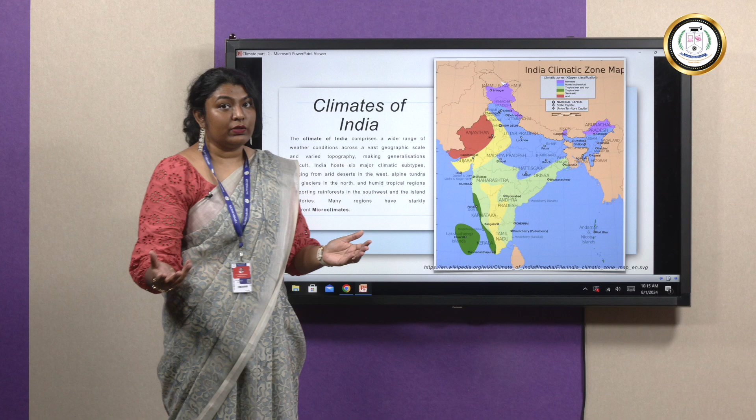Moving from Rajasthan towards the mid, we have the semi-arid, and all the green spaces you can see are the tropical climates. In specific, we have the tropical wet, which has a lot of rainy days alongside the coast, starting from Kerala, moving towards Maharashtra, which also covers the Union Territory of Goa.

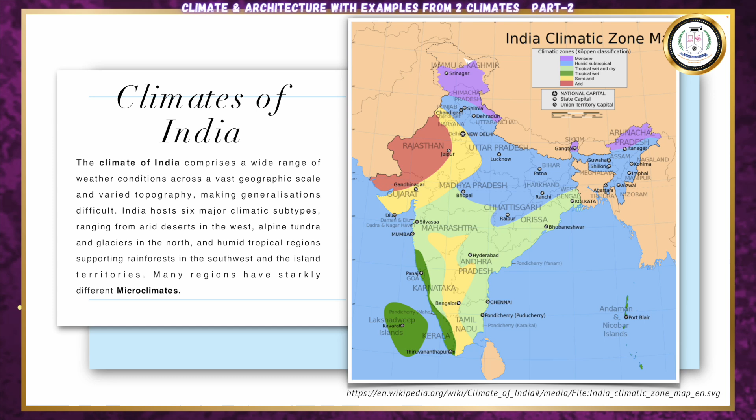The rest you can see is a lot of tropical wet and dry, which have distinct wet seasons and distinct dry seasons. Throughout the middle, you can see a bit of semi-arid, especially around the Deccan Plateau, moving towards the south of Tamil Nadu. So now coming to tropical wet and dry.

If we're going to specifically talk about wet and dry, it is moderately hot. It has high levels of humidity, and it is mostly associated with the coastal area of India. Temperatures don't fluctuate as much in these regions, and there are distinct wet and dry seasons.

That is, there are distinct seasons where there is rain, and then there's a distinct season where there's not much rain or no rain at all. Temperatures are usually moderate to high throughout the year.

Now, what are the components that make up tropical wet and dry climate? First off is the precipitation. We already talked about it: distinct wet, distinct dry, and the weather.

We also see convectional thunderstorms day to day. The locations are in the mid states of Madhya Pradesh, Orissa, West Bengal. As you move down, you have Maharashtra, Karnataka, and the five southern states.

Flora and fauna: because of the wet and dry conditions, there's a very diverse flora and fauna which forms the biodiversity. I think the Nilgiris is a very good example of a biosphere which has tropical climate, and the vegetation is biologically diverse.

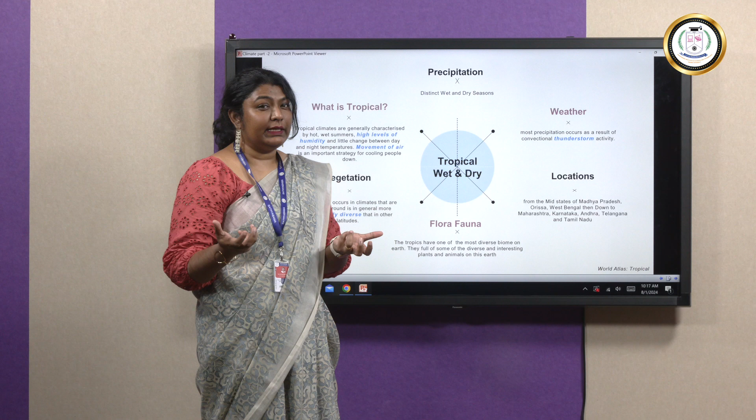When it comes to what exactly is tropical, it is generally characterized by hot, wet summers, high levels of humidity, and little change between daytime and nighttime. That is, there is not much diurnal change in the temperatures.

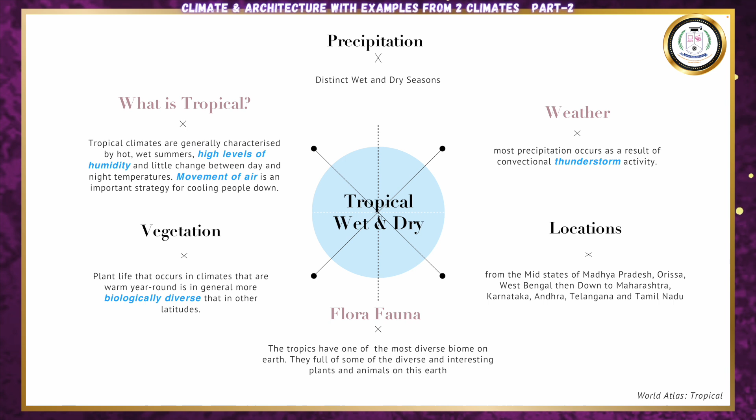Movement of air is a very important strategy to make sure people don't feel sweaty and sticky. So, starting with the design strategies: first, we have the basic passive strategy of orientation.

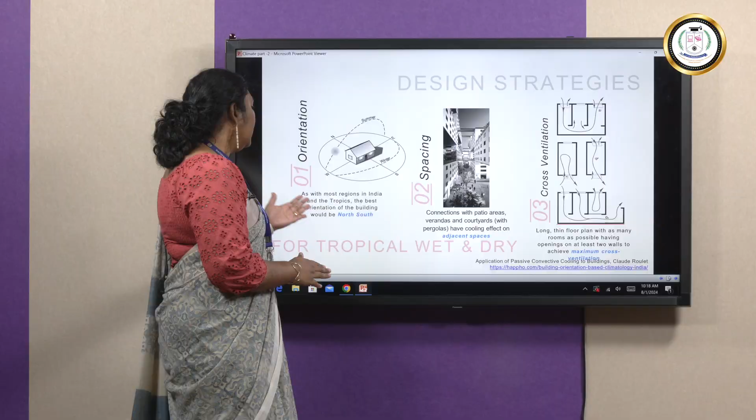In most regions with wet and dry climate, it's best if we have orientation towards the north and south with longer walls and longer surfaces, and east and west with shorter space.

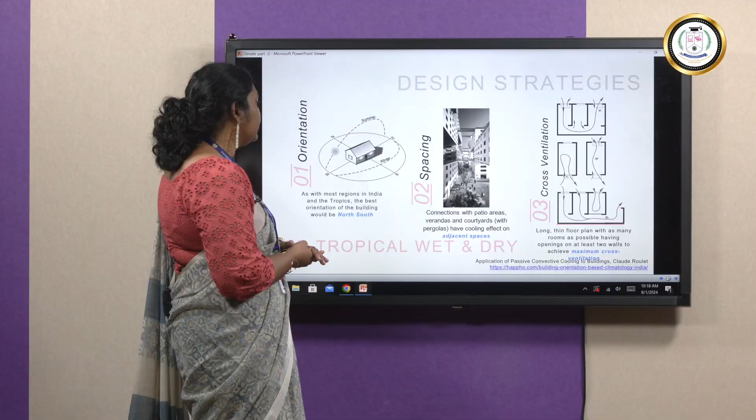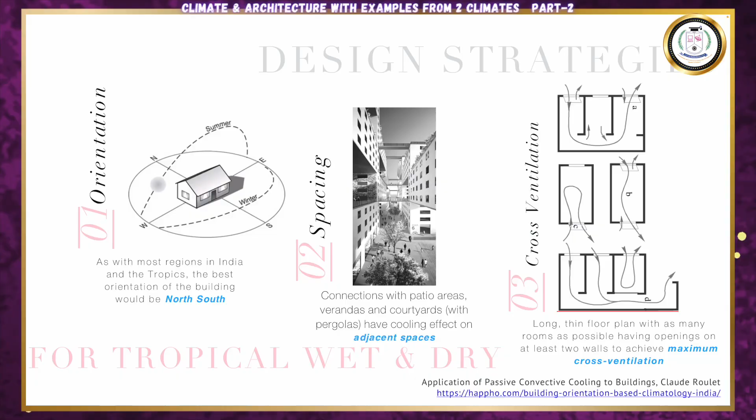The spacings need to have connectivity and openings in between, so we can add atriums and courtyards to increase cross ventilation, which is a very important aspect of this humid condition.

Verandas form a very important role in this particular climate, because we need that open space around the building which acts as a buffer between the outside and the inside.

Shading is not just for the sunshine but also for the rain that comes or shouldn't come within the building.

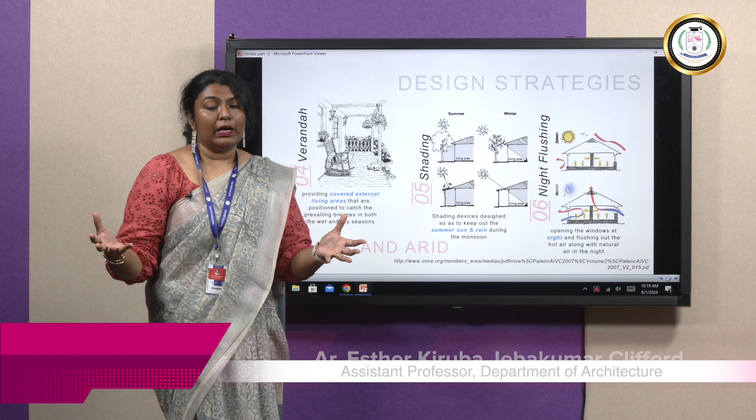There's something called night flushing, which we can do in tropical climate, where we restrict the amount of air that comes into the building in the daytime, and then we open the building up at nighttime, and there's a huge gush of air that comes in, and it gets cool during the nighttime.

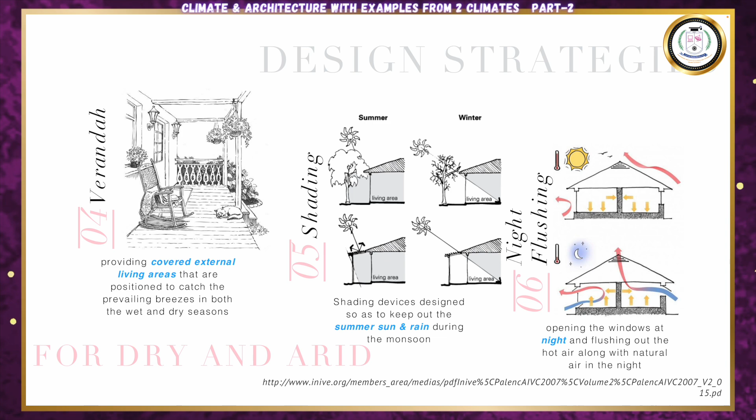This doesn't always work. I think when we are using the building during daytime, it might not work as much, but it will work when you're using it predominantly at nighttime.

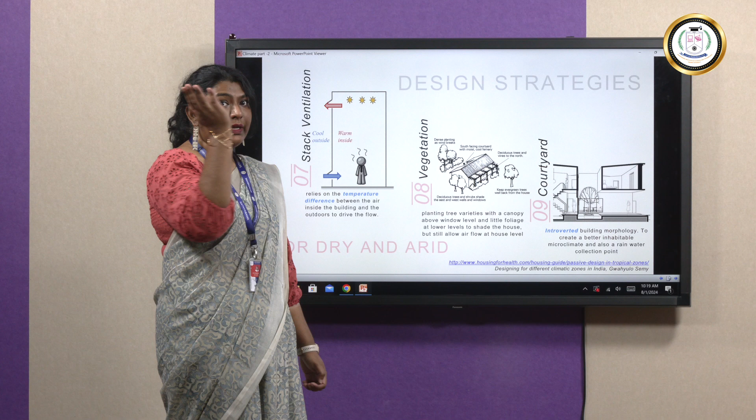Then you have stack ventilation. Stack ventilation again follows the principle of convection, where you start pushing all the hot air outside and upward, so the cooler air stacks at the bottom.

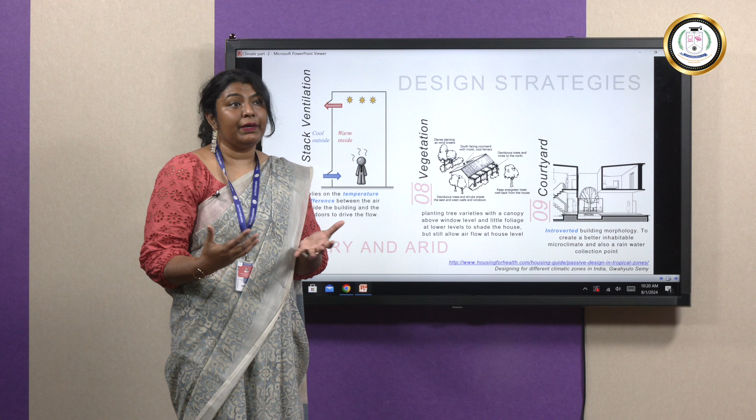You can use vegetation as a form of reducing heat gain and making the space comfortable. Based on what kind of trees you have, you can work with landscaping and use indigenous and native plants, so that there's not much water usage as well.

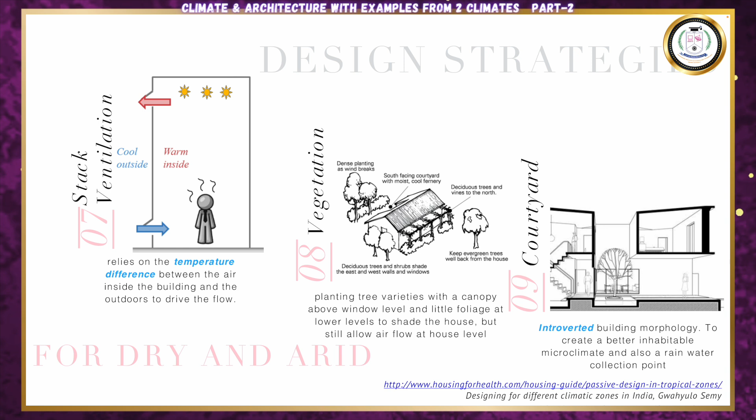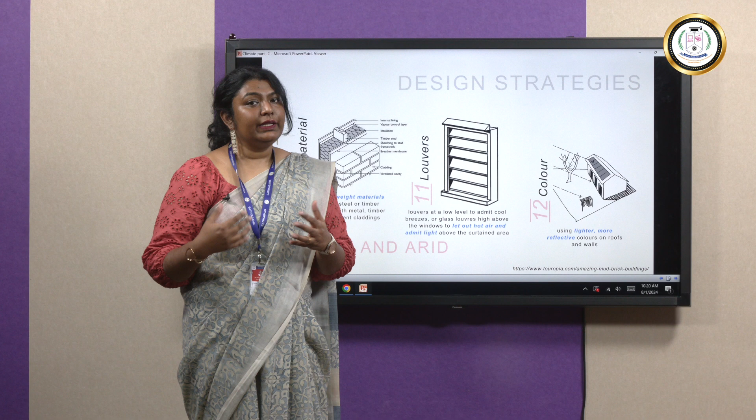Very similar to the previous dry and arid climate, courtyards with an introverted morphology help create comfortable spaces. When it comes to materials, lightweight materials work well with wet and dry conditions. Louvers can help not only let in light, but also air in the form of ventilation. Using lighter colors helps reflect back heat, which is a definite design strategy.

So what are the design inferences overall? The morphology is where we maximize skin opacity, making as many openings as possible, and stacking the building to ensure lots of ventilation so hot air is pushed out. We reduce internal obstructions in terms of density, and arrange buildings so they're not spaced too densely together. For the roof area, we might need portal roofs or sloped roofs where there's more rainfall.

We need deflective or reflective surfaces, larger openings to let in ventilation, shading for both rain and sunlight, and thicker walls with larger thermal mass to reduce the heat coming into the building.

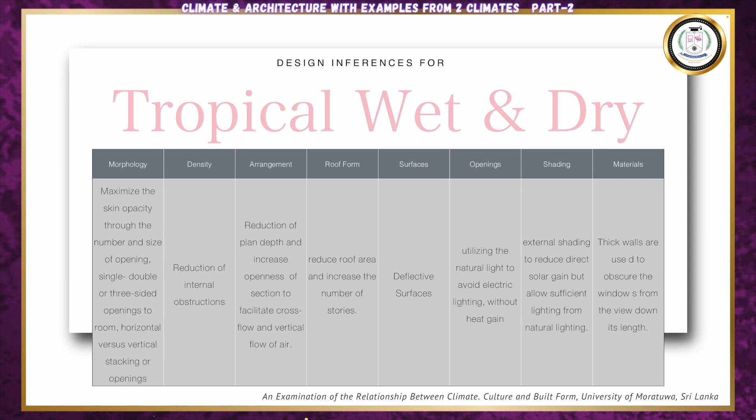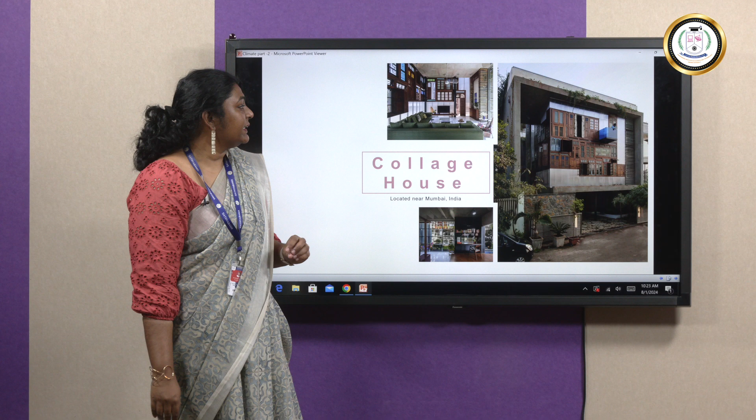The example I've taken for this climate is the Collage House, located near Mumbai. It's been featured as one of the most unique houses in the world, and you can see why given the kind of windows arranged all around the facade. This is in a typical wet and dry tropical climate.

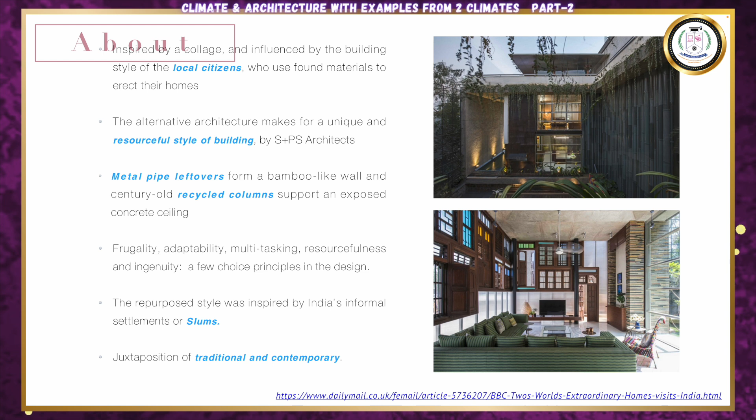It's inspired as a collage because you can see how all the windows are put together in a particular design. It's interesting that this house used a lot of materials that would have otherwise gone to scrap or landfills—they took the materials, refurbished them, and reused them in this building.

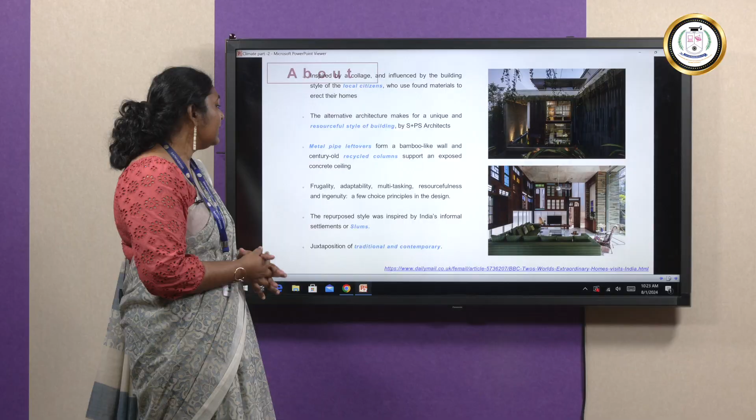This is by S plus PS Architects. They've used a lot of reused materials, like recycled columns or pillars taken from local traditional houses, and metal pipes which act as a water feature and also in the rainwater harvesting system within the building itself.

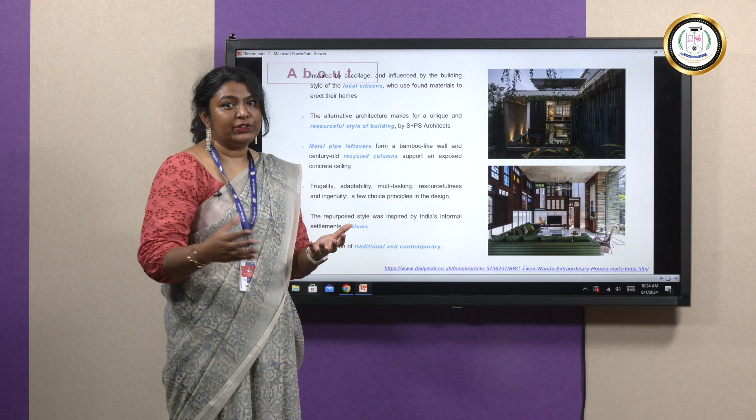The style is inspired by the informal settlements of Bombay, where you see a very vibrant, colorful atmosphere, since they tend to use a lot of discarded materials within their housing. There's a juxtaposition of contemporary and traditional within this building—you can see how they've taken windows from different buildings from different eras and put them together to form the front facade.

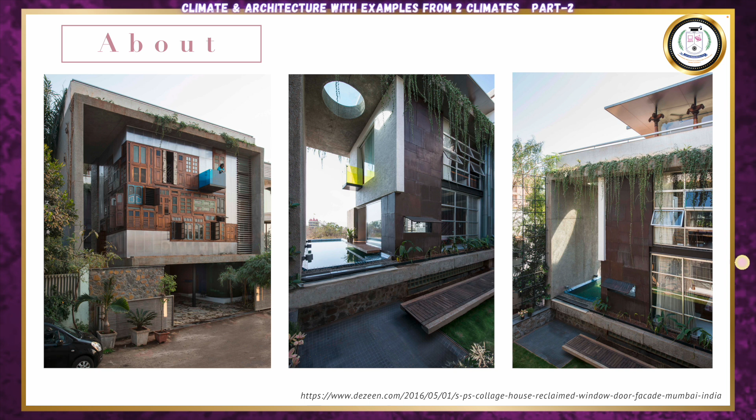The windows aren't locked; they're all reachable and usable, which helps bring in a good amount of ventilation. You can also see how they've introduced smaller water features which help with evaporative cooling during the distinct dry seasons.

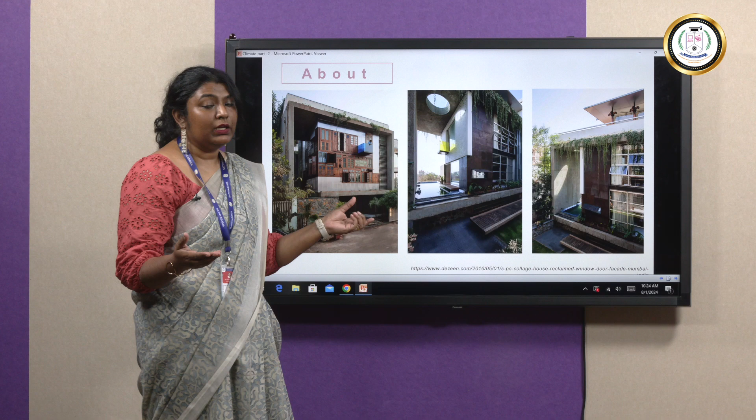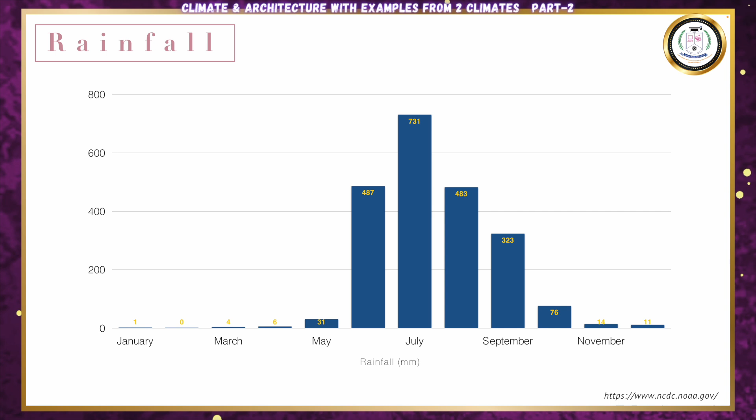So now what are the techniques that they've used? Like we already saw, this is a juxtaposition of both modern and traditional architecture. They've taken some of the modern components, using solar panels on the roofs so that they can be powered with renewable energy.

They've repurposed pipes which not only act as an aesthetic element but also bring down water during the rainy season into the rainwater harvesting pit. There's a north-south orientation with longer walls on the north and south, and they have projected balconies.

And this is the really interesting part: within the site and within the building itself, at the lower basement level, they have a 50,000 liter rainwater harvesting tank. This was actually excavated during the initial foundation process, and they started using it within the site itself. Now when the building is in use, it's used as a rainwater harvesting tank which they can reuse the water with.

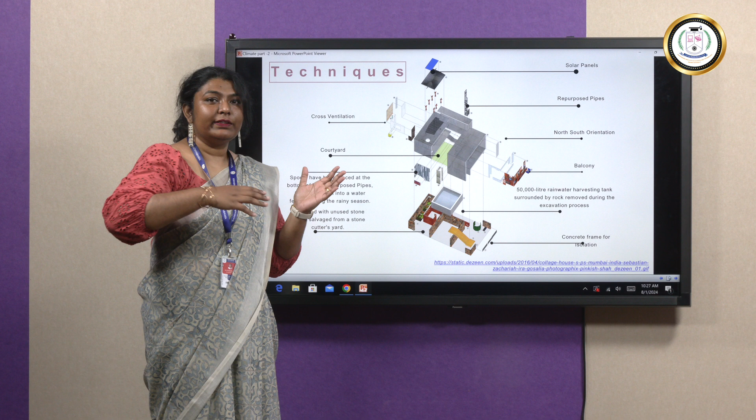There are spouts alongside the repurposed pipes, which also turn into a water feature, where during rainy season there's an onslaught of water coming through these repurposed pipes within the building itself. There's a large courtyard, and ample large openings which help with cross ventilation.

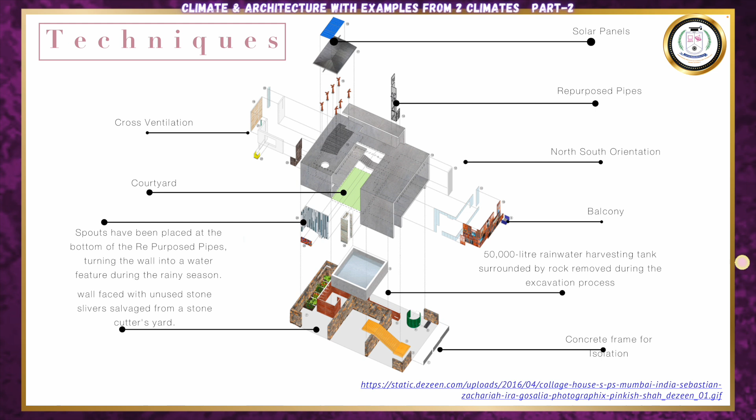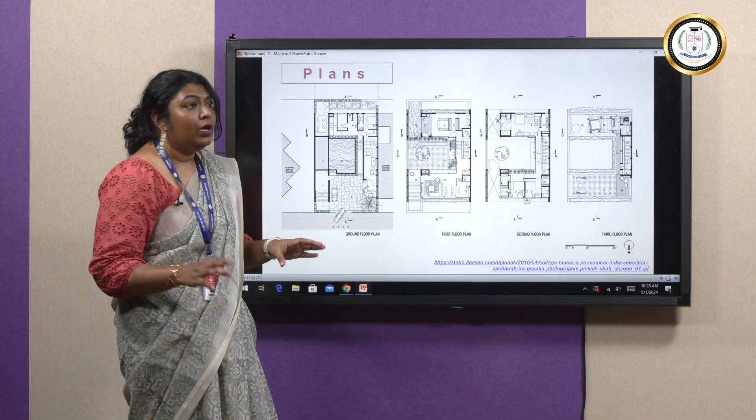The first floor is where the major activities happen, and the courtyard rises till the second floor. From the third floor there are other activities, especially at the top, where they have this beautiful bedroom with repurposed columns. We'll see pictures of that.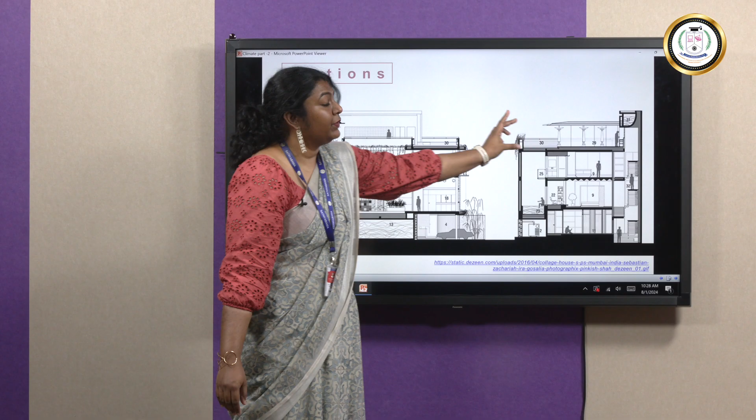So through the section you can see how the top floor is used for one bedroom. There's this large family living here, and one of the couples has the master bedroom on the top floor, where they've used repurposed columns from older buildings, with a view into the courtyard from the top floor.

You can see number 13 here, which is the rainwater harvesting pit. Like I said, only the car shed, the rainwater harvesting pit, and common activities happen at the ground floor level; the main activities start from the first floor level.

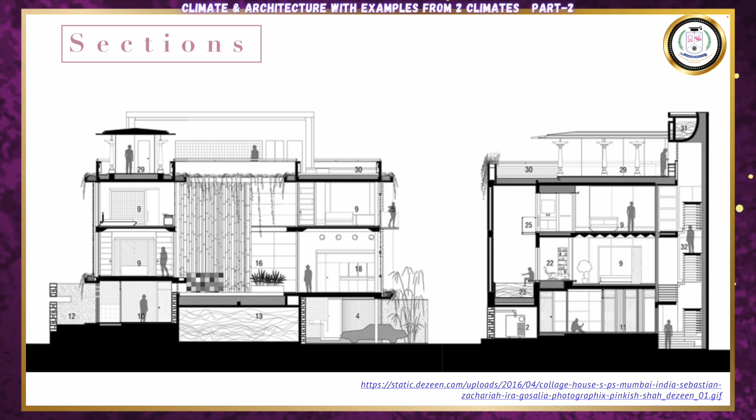This is also because they've tried to reduce the cut and fill at the site level, working along with the existing topography of the site.

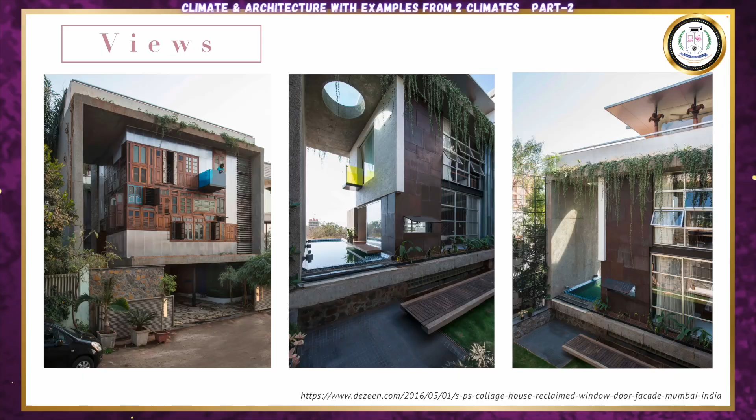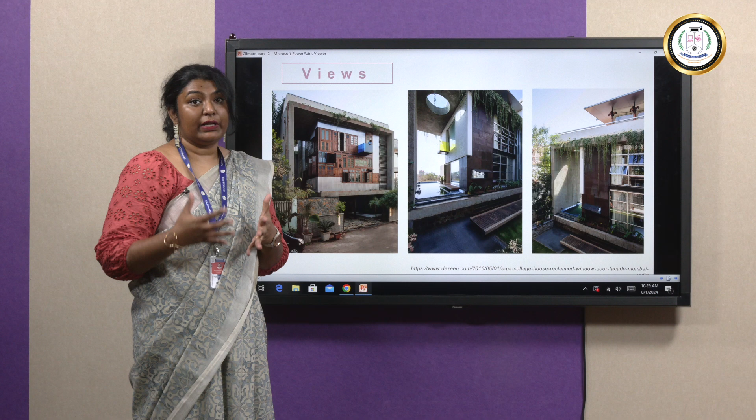And finally, you have the set of pictures to show how they've been able to achieve all these strategies, not just in terms of climate responsiveness, but also from the standpoint of aesthetics.

This picture gives you a nice insight into how, from the scrapyard, they took these windows. These were the raw materials before they were given any kind of finishing, and how they were fit within the facade of the building.

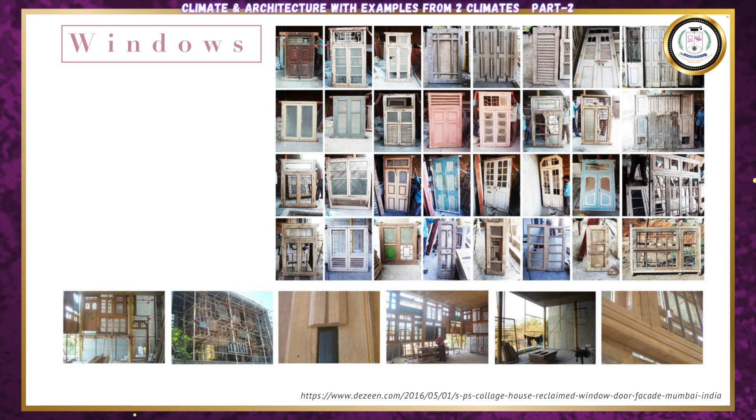You can see how the entire facade is filled with these windows, which rightly gives the name collage house.

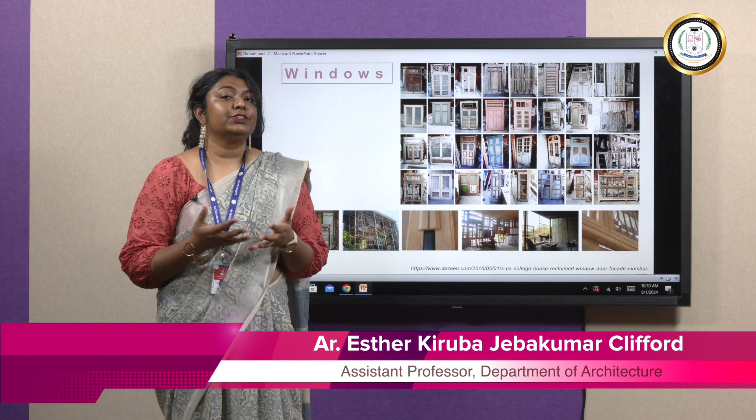So I think this will help you get an insight into how even in modern times, with contemporary directions, you can still work with traditional techniques, working along with modern technological innovations, and come up with really good design.